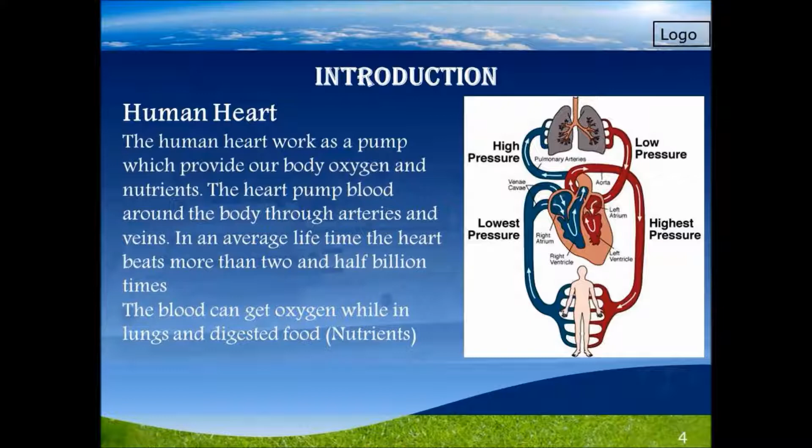The aim of this project was to design a single chamber artificial heart powered by a pneumatic cylinder using compressed air. The main objective was that the output characteristic of this artificial heart would be similar to an ECG waveform, the electrocardiogram wave.

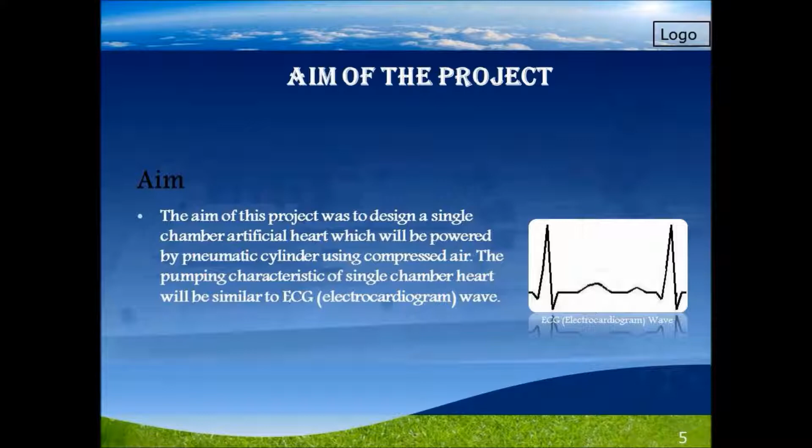The methodology used was necessary because this project was not just a one-direction project. It was based on mechanical, pneumatics, electrical, and computer-based software design. Starting the project, the first thing was calculation of the O-ring groove size, the piston diameter, and the bore size of the heart. Once the calculation was agreed, the model was designed using SolidWorks software.

After designing in SolidWorks, I ordered the material - made from machine-grade polycarbonate, selected for its clear characteristic so we can see what actions are going on, how the blood is pumping. Once the part was received, the drawing was given to the university technician, who fabricated the part. After receiving the fabricated part, the test stage came, where testing was done on this artificial heart to see how much friction the compression due to the O-rings involved, and how much force we need to operate it.

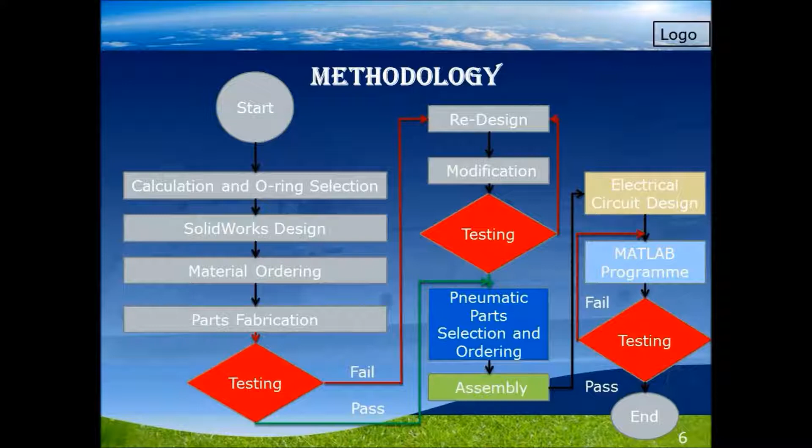If the force we're looking for is achieved, we agree and move to ordering the pneumatic circuit. If the test fails for what we're looking for, we need to redesign and modify the drawing, then test again, then move to assembly, electrical design, MATLAB design, writing the MATLAB program - with the same situation at each stage: testing and reversing back if it passes or fails what we're looking for in our project - and then we finish our project.

So the design goal was to get the O-ring from ISO 3601, a standard international standard for O-rings, so the O-rings would be easily accessible in the market. The second thing was the artificial heart bore design calculation based on the O-ring, designing the model using SolidWorks, and calculating the pneumatic cylinder based on how much force we need - which type of pneumatic cylinder, its diameter, and how much force we need to generate to operate this artificial heart.

And then selecting pneumatic cylinder parts like non-return valves, directional control valves, and push fittings and similar items, along with electrical circuit design, and writing MATLAB codes.

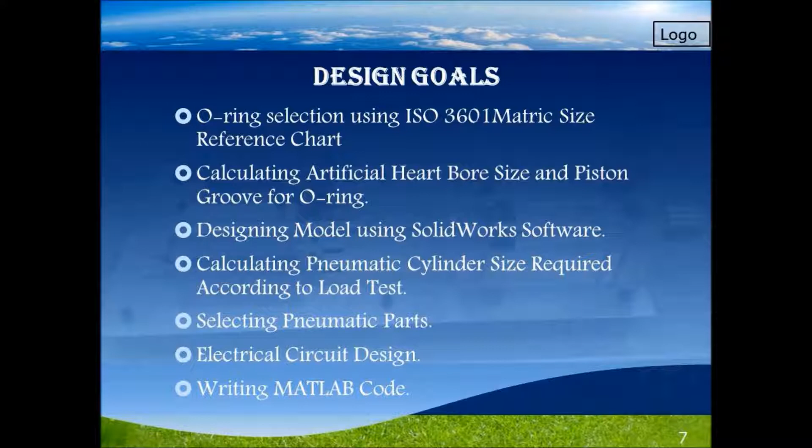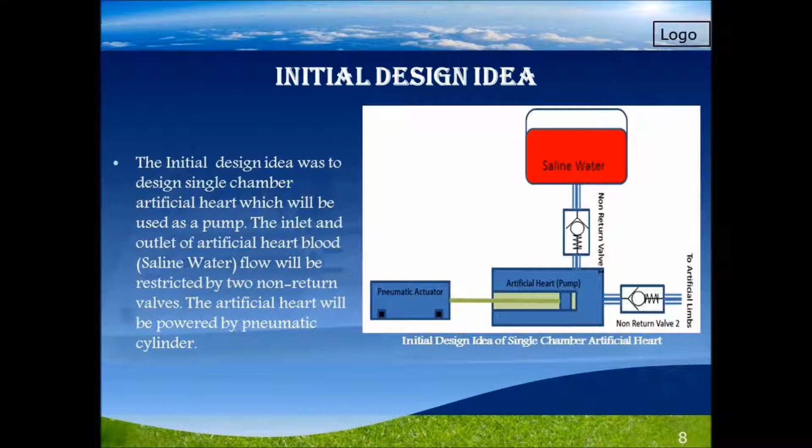The initial design was set up with the heart using two non-return valves. The basic idea of using two non-return valves is to make the blood flow in one direction. So when it sucks in on the pushing stage, the saline water, which represents the blood, pushes back, and this non-return valve blocks flow in that direction, so the blood flows in one direction and doesn't reverse back.

That's the CAD design. This model is fully assembled now, but in real terms that's a drawing. The technician gave me this part after drawing it, and it was pretty good in that sense. The technicians did a very good job.

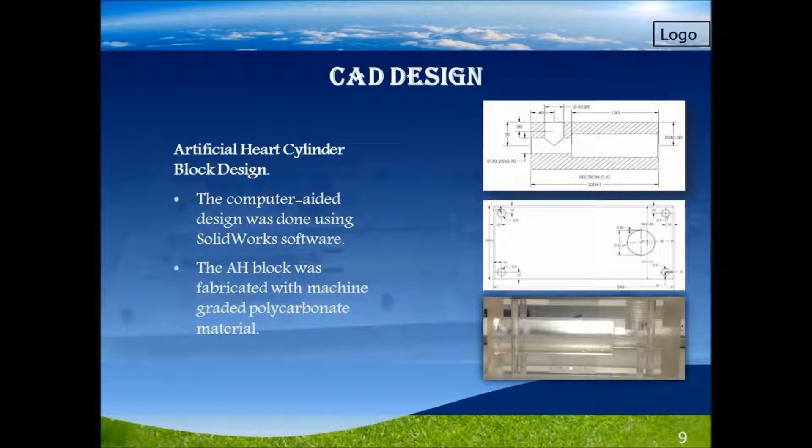Designing the piston block for the artificial heart, the piston was also drawn on SolidWorks, and the fabricated parts were done by technicians in the university laboratory. This is the base plate model, and the grooves are set up to allow us to move it if we want to increase the blood fluid output, so we can move our cylinder, giving flexibility to increase the volume in our artificial heart.

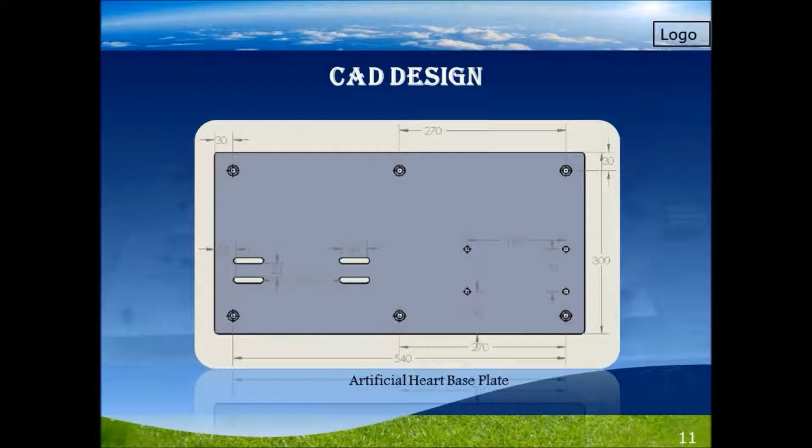To see how effective our heart is and its operating characteristics, different tests were performed. We looked at how much force is needed to operate it and how much compression ratio causes movement of the artificial heart. The first test checked how much operating force was required. The test was performed at O-ring compression of 10%, and the result came up at 1100 grams, so putting 1100 grams weight moved it. The force required was 1100 grams.

The next stage was checking if the 10% inner sealing would leak. I applied a 35 kg load on this cylinder and no water was leaking. This bit has a small water leak because the PTF fitting wasn't properly fitted, but the O-rings still had compression. As you can see, this is the water level in the middle, and it's providing very solid sealing characteristics with the O-ring.

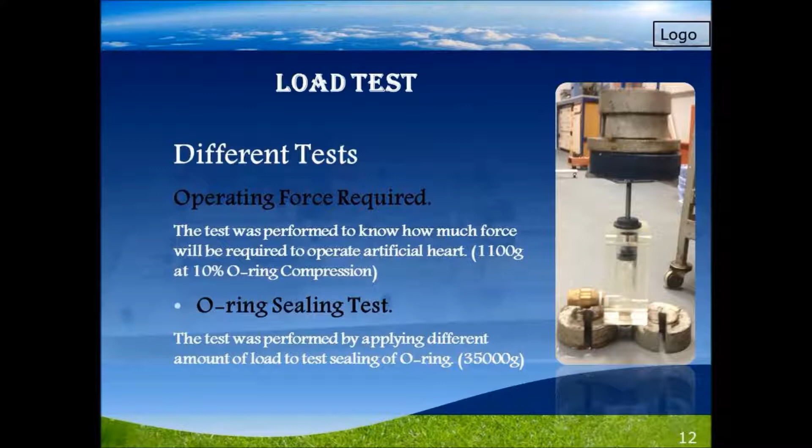The next stage, some of you may know how a directional control valve works and how solenoid coils work. This is a 5-port, 2-position solenoid valve, a directional control valve. In real life, if you come across one, by looking at it you can identify which is your pressurized port and which is your exhaust port.

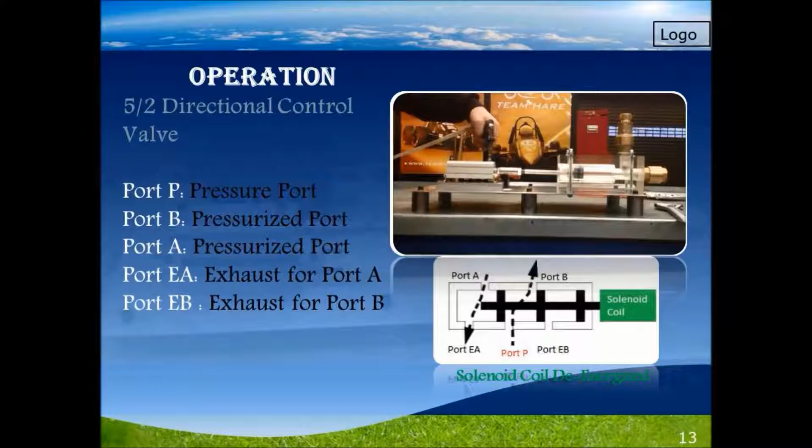In this case, the solenoid coil is not energized, and the pressure goes from port P to port B over there. As you can see in the top picture, the pressure on the B side moves it back. Similarly, by applying power now, the solenoid coil is energized and the cylinder moves in the forward stroke.

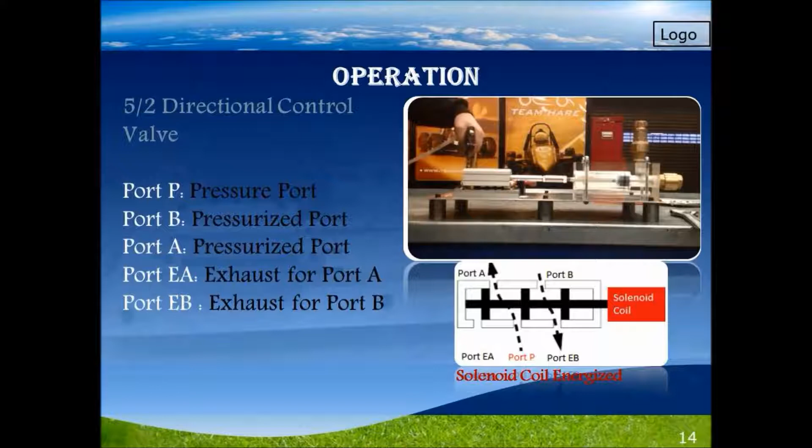As you might know, it's holiday season, and the part is still delayed and needs to be ordered. So the test was done by manually applying the air, and as you can see, it's pretty much smooth operation of the artificial heart. That was done in the laboratory, and as you can see, even here the O-rings become a bit sticky, but it's pretty good in terms of operation. It needs less force.

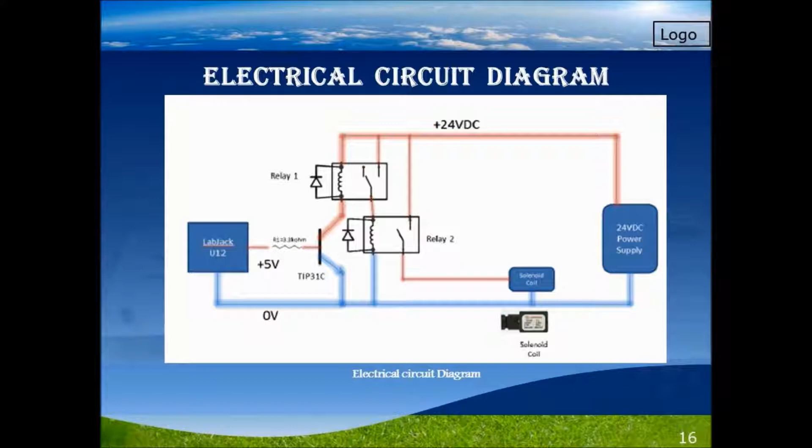That's the electrical circuit. The LabJack is powered by USB and has a 330 milliamp maximum current output at 5 volts, so a current-limiting resistor is used, switching a transistor, and the transistor switches a relay. That relay operates another relay to power the solenoid valve, which is here, and an external 24V power supply is used. In real terms, there's a MATLAB program interfacing with the LabJack.

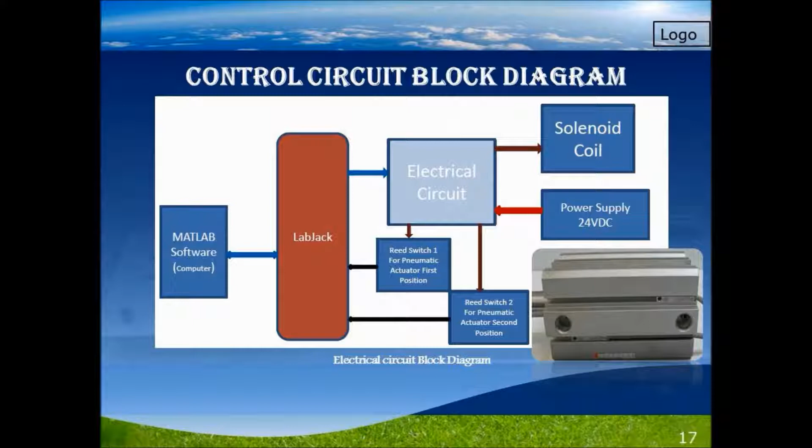The LabJack is connected to this electrical circuit board and two reed switches, reed switch 1 and 2. The reed switch, as I'm still waiting for a part to move it up and down, will tell us which position the cylinder is in. Based on that, it goes back to the LabJack and MATLAB, which makes a decision on which direction we need to move.

In conclusion, this project is part of non-invasive electromagnetic flow monitoring for imaging arterial blood flow in artificial limbs. The School of Engineering is doing this project to measure blood flow characteristics in the limbs, which will in the future affect diagnosing heart diseases and how conditions in the limbs can cause these heart diseases.

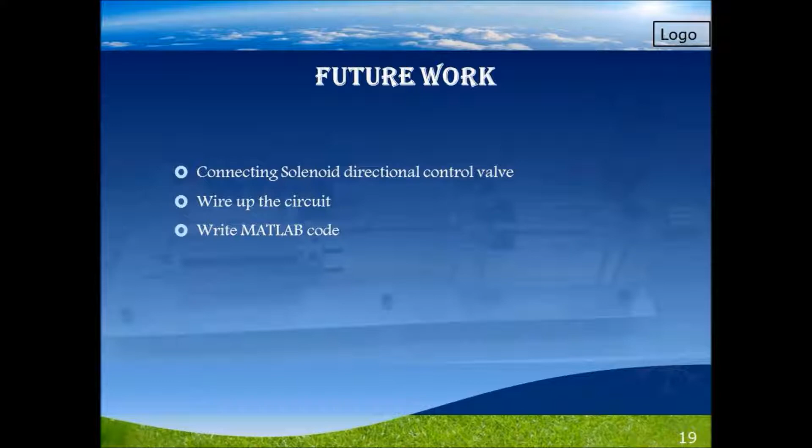Future work requires that once the parts are received, we need to connect everything together, wire it up, and write the MATLAB program. Thank you for listening. Any questions?

Very good. Well, I know this project very well, so I haven't got too many questions. Could you email me your talk, please? There are a few things like the video that I have to see after the meeting. Has anybody got any questions? I know this project so well, you know.

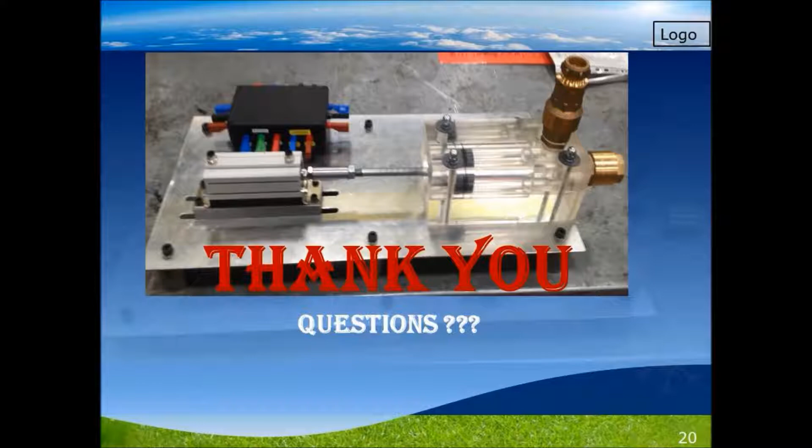I think that was a very good presentation, very lively and it kept good time. It was nice showing the movie in there as well. Well done. Thanks, okay, thank you.

Oh yeah, okay, very good. Very good presentation, now I know you are really professional. Now I know, no, you told me and I didn't believe you, but now I believe you. Very good, very good, all right, thank you.